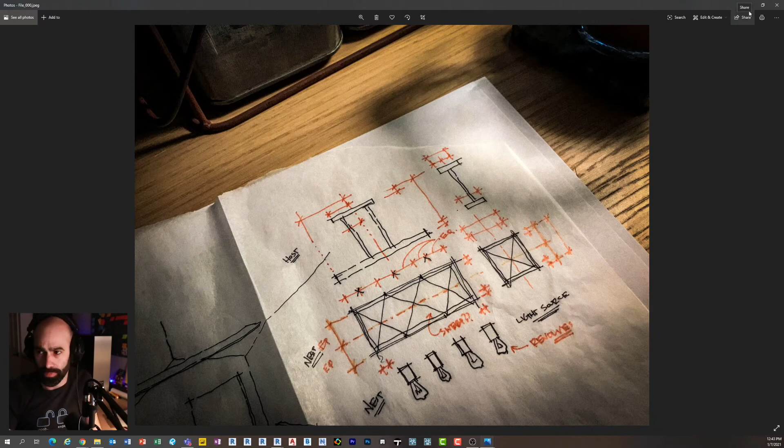The cage is going to be a nested family, and then the housing with the cables and all that stuff is going to be a nested family. And so that was my initial sketch. As I went through it, I realized that there actually was going to need to be one more nested family, and we'll talk about why.

Let me zoom out a little. So as you can see, we have the host, which is the railing, and this is the plate on the top, and then the plate on the bottom.

Then we have number two, which is my Edison bulbs, and that's going to be placed four times. There's four of them, so you make the family once, you nest it in, and you place it four times. There is my cage, and you'll notice the X bracing on the cage is actually a nested family, and we'll talk about that in a second.

So at the end of the day, there ends up being three nested families into one hosted family. So it takes four files to make this one family. But we're going to walk through why that is and why it's important.

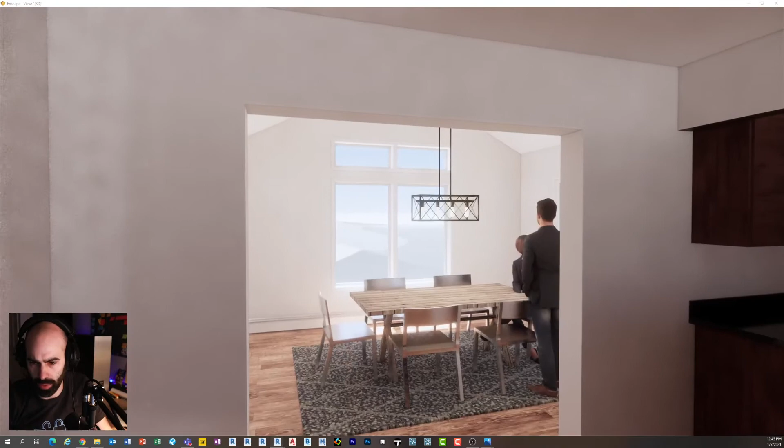And just to give you a sense of what the final one looks like in space, here's Enscape. I just now started adding some finishes and details in the interior. I didn't do too much more than I needed for documents, but you can see here's the light fixture there, right in space. Pretty cool. You can see it, as it is.

So now let's talk about how this family's built and why it's nested the way it is, and I'll run through sort of the start. So here is my host family.

What I mean by host family is this is where all of the other family files, the other pieces of this component, are going to be loaded into, and then this is what you load into the project. So everything else I show you after this, you're not loading into the project. Those are loading into the family.

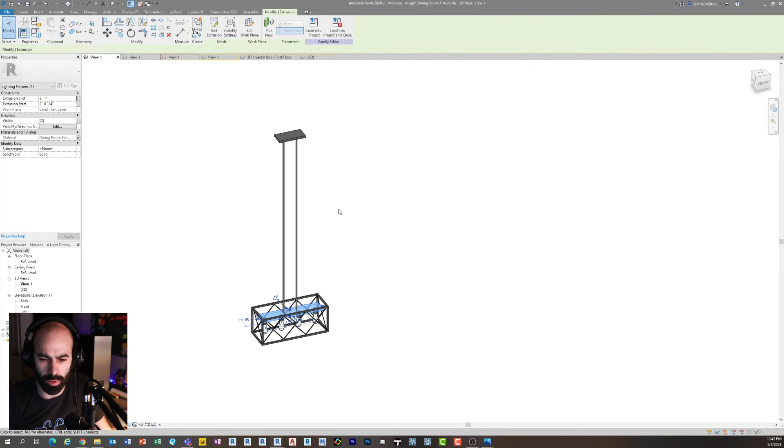So this right here is the host, and I said usually there's sort of two reasons why I choose something to be a host. One is the more simple objects. So you can see this is pretty simple. If I click, there's an extrusion here, there's an extrusion here, and there's two rods here, I guess you could say. So that makes kind of sense, right?

The other thing is obviously a host family, if you're hosting it to an object, you're going to want those things to be part of the object. And I know there's going to be a little bit of a debate, and I'm completely open to it, so make sure you guys chat down on the bottom.

For this one, I actually went with a ceiling hosted light fixture—sorry, a ceiling hosted generic model. Not a light fixture, because I didn't want the light source in there. So I started with a ceiling hosted generic model.

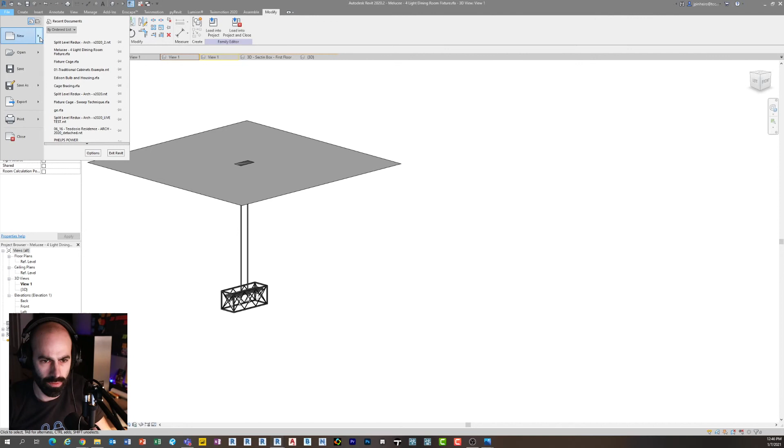So let's do that. Let's go File, New, and I'll talk a little bit about why I did that. File, New, Family. And of course, all my stuff is going to open on the other screen, I apologize. So I'm going to go with a generic model ceiling based.

Two reasons. I know a lot of people like to do face based, which I'm a huge fan of for light fixtures, because then you don't need a ceiling there—you can host it to anything you want. My biggest issue with face based, especially right now, is that you have to build it upside down. Anyone who's ever built a face based component knows the face is down, you have to build it upside down, which is super confusing, especially when you're trying to teach. So that's one of the main reasons why I did a ceiling based.

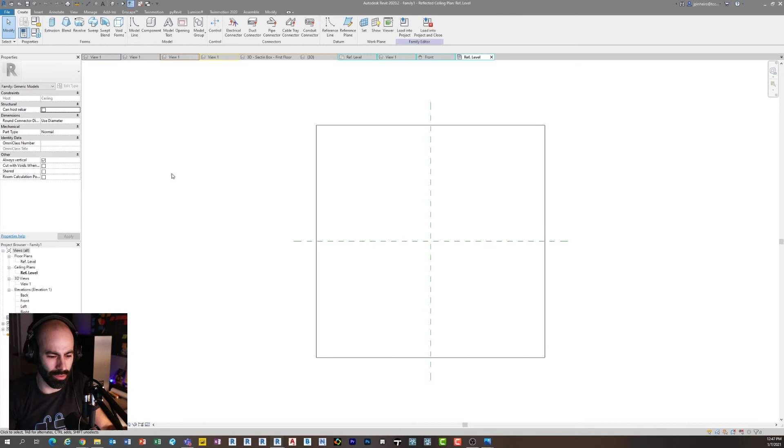Otherwise, we can go through the reasons why you may want to do one or the other.

Real quickly before I jump in, Rick just asked what the file size is. Honestly, I didn't even look yet, Rick. Let's take a peek. I'm curious now. So 732 kilobytes. So not too bad. Still under a meg. So I mean, I'll take that.

Okay, so now this is a ceiling-based family. So if I go in 3D, right, there's my ceiling. So I'm gonna be drawing it basically in an RCP type of deal. So as with everything in family creation, what we want to do is build our reference planes first. Okay, you want to build your cage.

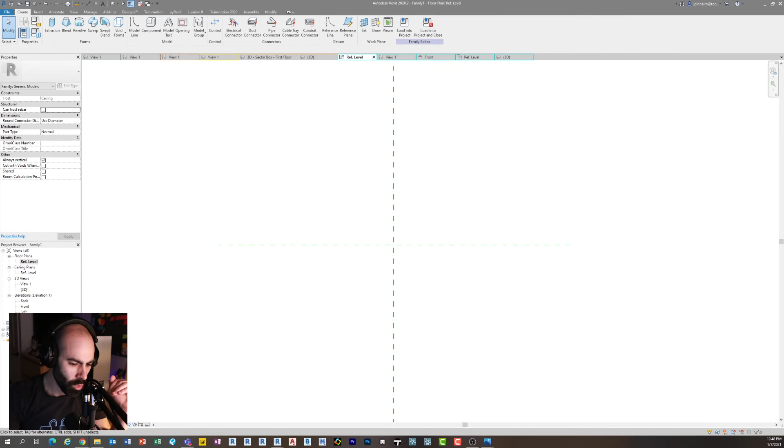But what you'll see is that the whole idea with families is you want to create your rig out of reference planes, flex and test it, and then you build your geometry. It's the easiest way to do it.

So if I'm going back to my sketch and I'm looking at this host now, you can see I have a plate, and then I have a bulb holder, we'll call it, or a bulb housing, and then I have two rods. So we're just going to quickly draw the reference planes for those. And I am going to go a little bit faster this part because we only have so much time, and I really want to get to some of the nuts and bolts.

So what I'm going to do is just draw a reference plane, RP on my keyboard. I believe this is 10 by 10. If you don't believe me, I'll go here and show you. So you can see the box is about 10.3 inches by, or the top box is 10 inches by 4.25 inches. So we're gonna do the build plate right now.

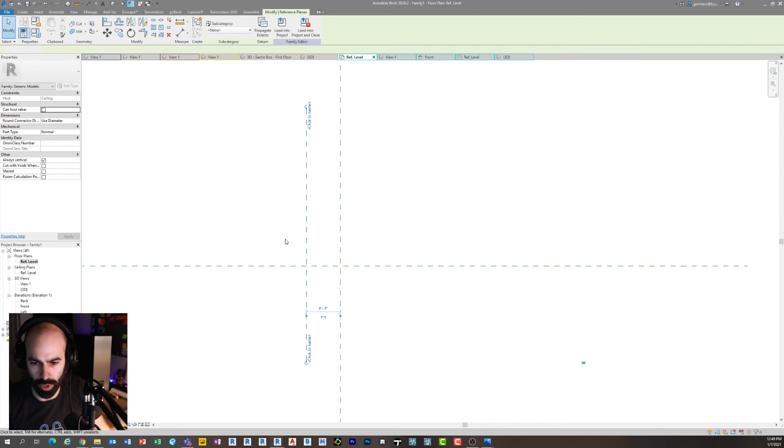So there's 5. I'm gonna use MM on my keyboard to mirror it. I'm gonna draw another reference plane here. I'm just gonna move it out. What did I say? 2.25 inches. Sure. MM on my keyboard to mirror it. Okay. So now these reference planes here, these are gonna represent the wall plate, right? This is the top wall plate. Remember, I'm looking down in a floor plan view right now.

Okay, so this is what I'm talking about with reference planes. It's really important that you understand what we're doing is building the rig to flex everything, and then we'll build our geometry. Okay, so now I want to draw one more reference plane on this side for the housing piece, which again, I'll go back here. The housing piece I'm going to call the part that's holding the bulbs down on the bottom there. It's a long rectangular piece.

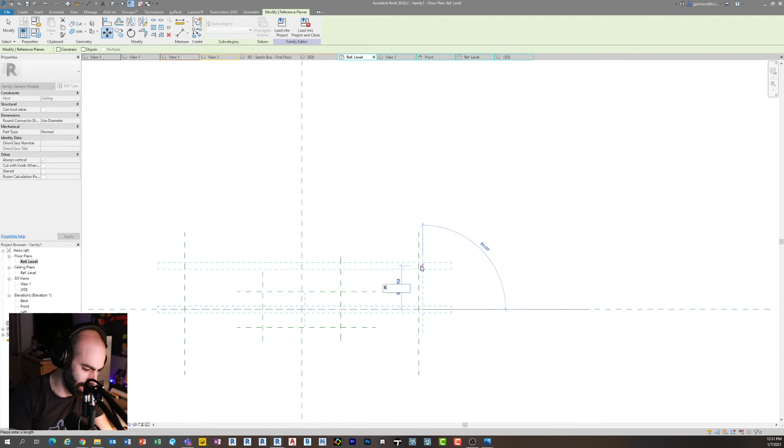Scoured just said, sorry, I'm just checking as I go along. Scoured says, I usually start with a non-host and then set it to a work plane check and check if it's always vertical. It is more flexible so you can rotate the work plane and etc. Okay, yeah, so Scoured is starting with a non-hosted object. And again, as I mentioned, one of the main reasons why I did it was for clarity and understanding while teaching. But there's different ways you can do it.

Notice what I'm doing here is as I'm drawing these reference planes, I'm actually pulling them back. This is something I do to help me in this view understand what all these reference planes are for. You can name them, you can do whatever you want with them, but I'm just sort of pulling them back. So now I just mirrored this. So now you can see I have these reference planes, and then I have these reference planes here. So this is going to be my bulb plate, which is actually way too thick, so we'll fix that after.

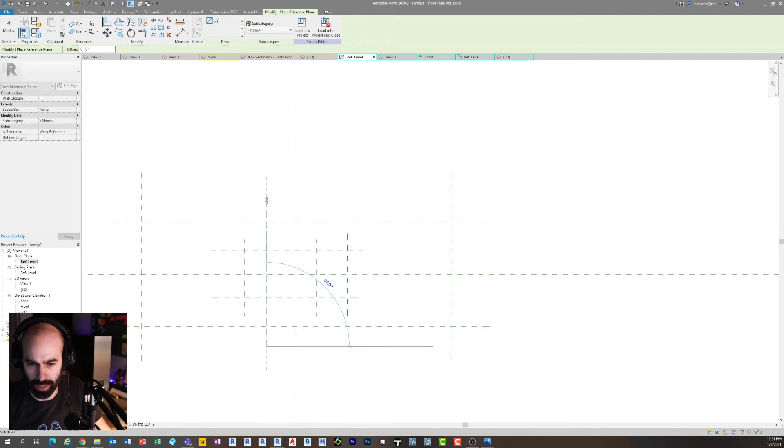And then my electrical conduit plate, whatever you want to call it at the top, wall plate maybe. So that's going to get us most of this. But now the only two other things we need are the cables. So I'm going to draw 2 reference planes here, RP on my keyboard for reference planes. I'm going to make this one a little bit longer.

And somebody asked if when I flex it, does everything flex with it? Yes. And so I didn't show you, I guess, how it works parametrically, but we'll just show it at the end then. So if I click here and type MM, these right here are going to represent my cables. So if I go back to the family, the 2 cables that you're running down there. And I'm going to show you some things that I do. Some people treat circles differently, but I think this is a pretty good trick.

All I need is an X. I need an intersection because my circles are going to actually lock to the intersection. Okay, so that's basically all I need for my host. I'm going to need a few more for the bulbs, but mounting plate, good call. Yeah, we'll call it mounting plate. All right, so now I'm just going to make my dimensions. Remember, reference planes, dimensions, flex it, then we draw geometry.

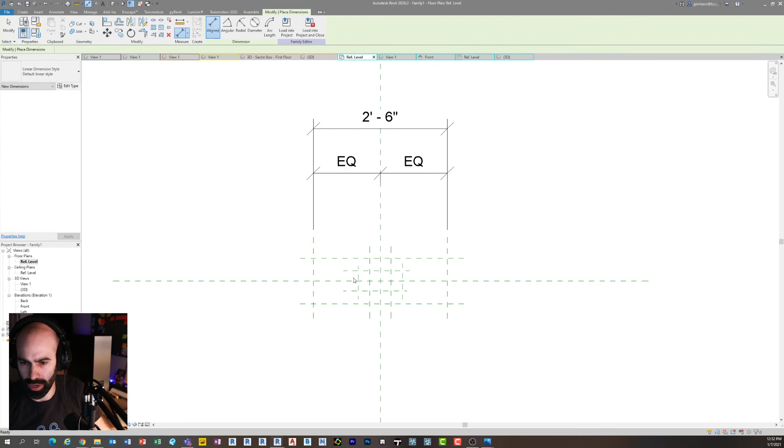Okay, so I'm going to do DI on my keyboard. I'm going to do overalls. I want to keep this thing centered, so I'm going to do dimension down to the middle. DI on my keyboard, overall, dimension down to the middle, and EQ. I'm going to change the scale a little so that the text isn't too big here for you guys. There we go. All right, so that's going to get my overall plates.

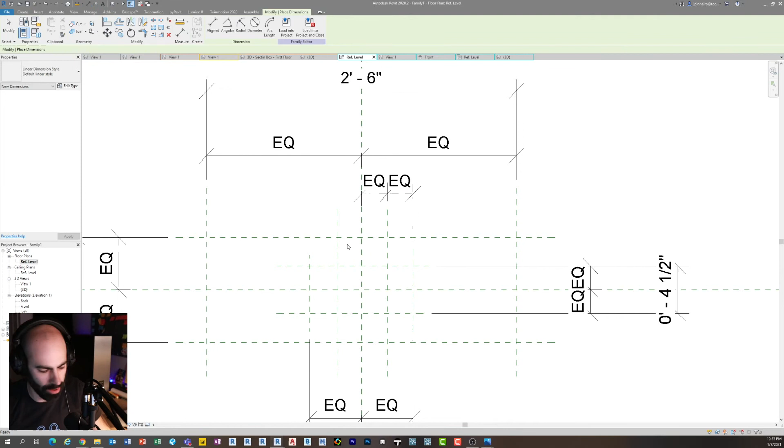And then if I go in here, I'll do my mounting plate, which is what we all just decided to call it. I'm going to EQ this. And then I'll do this dimension here, which is my mounting plate depth, I guess you could call it. I'm going to EQ this here. My circles or my rods are actually going to be just centered on that mounting plate on each side. I think that's probably the easiest way to do it. So if the mounting plate grows, it stays centered. So there we go there.

So now I basically have my rig for that piece, not the rest of the cage, etc. So now all I need to do is assign these dimensions to parameters and then flex them. So I'm going to click this, and again, I know I'm going a little fast. If you want to dig through more beginning stuff, it's the same stuff, just slowed down. Check out that episode I just posted.

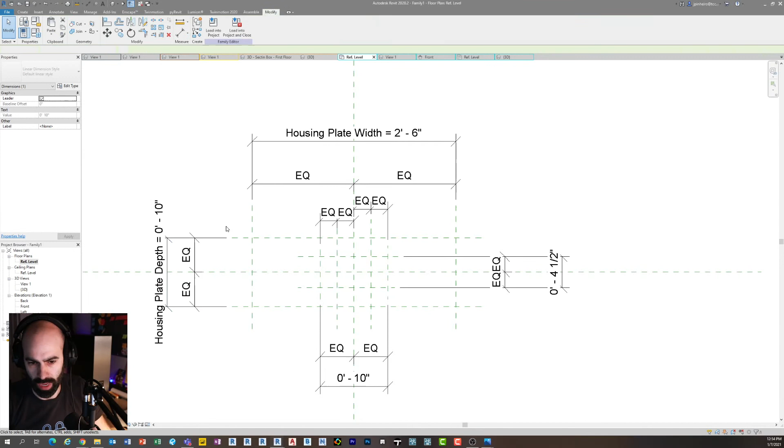But I'm going to click on the top here to add a parameter. I'm going to call this one, what did we want to call this? I'm going to call this my housing plate width, and then this one's going to be my housing plate depth. Housing plate depth. And I'm making these all type parameters. And I'm going to call this one my mounting plate depth. And then this one I'm going to do as my mounting plate width.

Okay. So now, if I wanted to, I can quickly just flex these parameters. So I'm just hitting the blue boxes on the top, and I can change this. So my mounting plate width, I'll change to 12 inches and click apply. And you'll see the reference planes grew. If I go back to 10 inches and click apply, you can see they shrink. And all this stuff stays in the middle. I'm not going to flex everything right now, but when you're building families, I suggest you flex everything before you build it. So then all we have to do is draw our geometry in here.

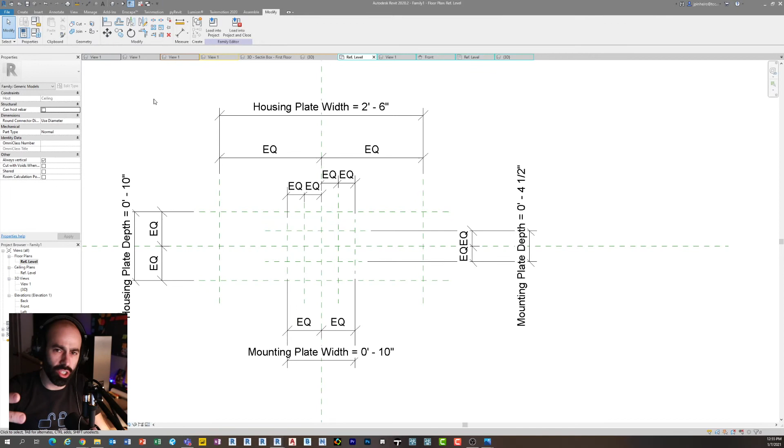The one thing I just, no, that's fine. So how do you draw geometry? Pretty simple. We're just going to create extrusions and set it and go on. But I just realized this is just floor plan view. We're going to want some reference planes in elevation, right? We want to have control over the thickness of the plates. We want to have control over the distance away from the ceiling. So I'm going to go to my front elevation, and you can see here's all my reference planes from my floor plan view, and here's my ceiling there.

Okay, so I'm going to draw a reference plane here. Sometimes I like to draw them and use temporary dimensions. Sometimes I like to draw them and move them. Right now I'm drawing them, moving them. Doesn't really make a difference. I'm going to move this down. I think it was 3'9". I don't remember exactly, but I'll just do 3'9" for now. And then I'm going to copy this down 10 inches.

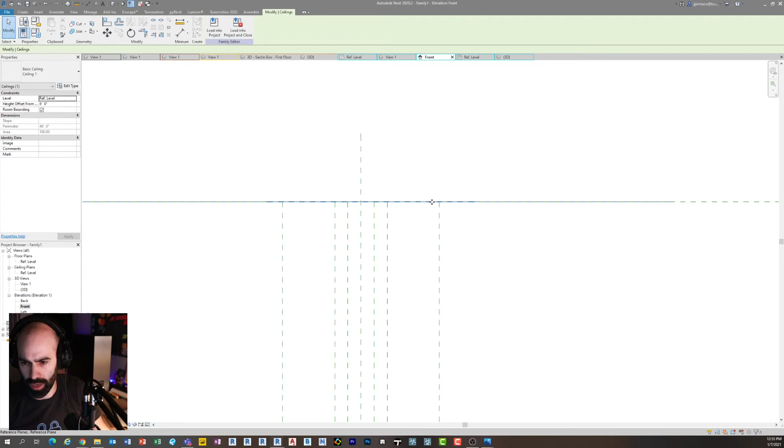So that's generally going to give us our cage, let's say. And then I'm going to go in here and I'm going to take this reference plane. I'm going to move it down 1/2 inch for the mounting plate. So right that, and you notice what I'm doing here is I pull this reference plane back. This is just something that I do that makes it really, really helpful when you're trying to figure out where geometry goes, is to pull your reference planes back.

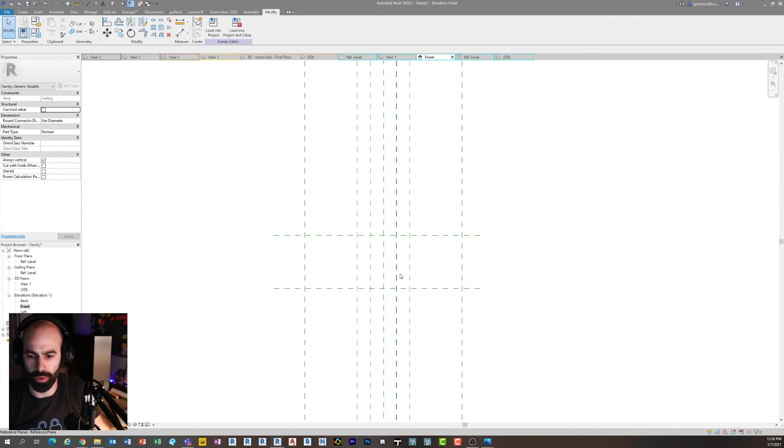I mean, you could name them too, but pulling them back to sort of draw the geometry for you is extremely helpful. Like even this one here, which you could see is going all the way down. If you were to pull this back, because this is only controlling the mounting plate, right? Now you're kind of drawing your geometry there with the reference planes. So something super helpful, and hopefully you guys can see the reference planes okay. I know reference planes are one of those things that are hard to project, but what I'm essentially doing is making this elevation here.

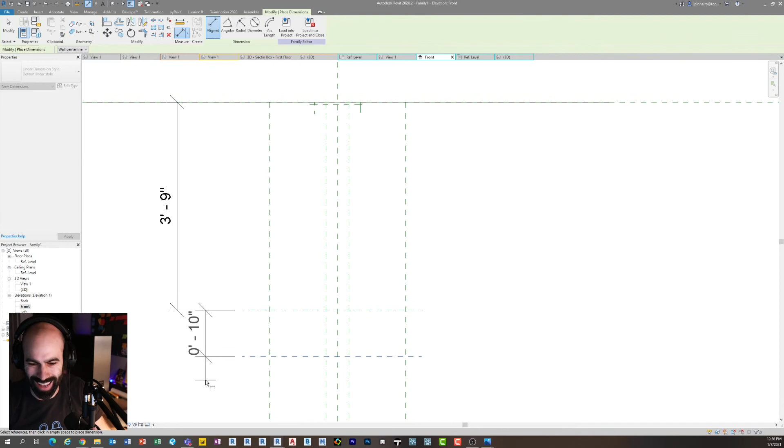Okay, so now let me just dimension it really quickly. I'm going to dimension it off of the reference plane. Again, we can go through a whole debate on whether to hit the geometry or the plane. I'm going to use the reference plane that represents the ceiling without debating why. And then I'm going to do another separate one. So you can't have a string here. You need these to be 2 separate dimensions. And these are going to represent the offset from the ceiling and the height of, let's say, the cage.

I just realized looking at this again, if I go back to the picture of it, oops, we're actually going to need a few more reference planes in here, because as you can see, what we're going to call the housing, the bulb housing, is actually offset from the cage. So I'm going to copy down now, and I'm going to make up the dimension of this and just call it what you're seeing there.

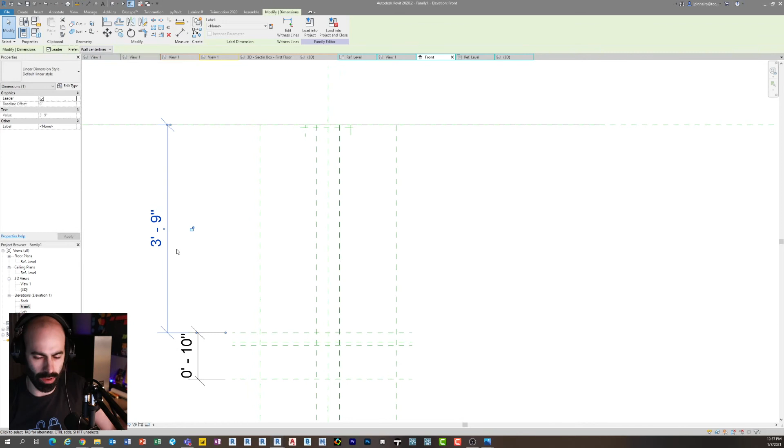Awesome. Looks like Mark said you can see the reference planes fine. So now this is going to be our actual plate. This is going to be our cage, let's say, and we're probably going to need more reference planes there for the cage. So we'll get through that down the road. I'm going to go to a more complete version, anyways. So then here I'm going to call this one offset from ceiling. Again, you can call these whatever you want, but offset from ceiling, or maybe down from ceiling, whatever. And then this one I'm going to call the cage height.

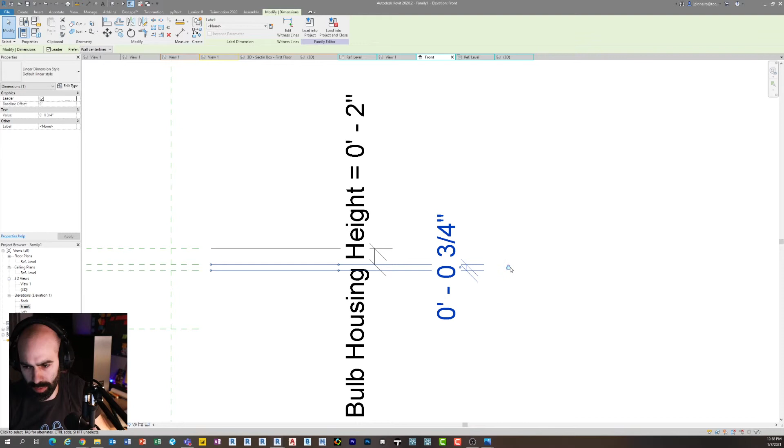And then here, depending on what flexibility you want, these can be lock dimensions, or these can be parameters. I like to try and give parameters wherever possible. Sometimes it gets a little crazy when you give parameters everywhere possible. So here we might say, just because if it gets too high, we might want to flex it, I might say bulb housing height, or offset. I'm not really sure what we want to call that. And then here, maybe I'll say the bulb housing is always going to be 3/4 of an inch, so I'm locking it. Okay, but that's not really important.

What I really want to show you, oh, actually, I didn't hit this one either. Let me hit this one here, right? And that's going to be our mounting plate height, or mounting plate thickness, whatever term you like to use. Mounting plate height. Okay. So now drawing the geometry is simple. Right now we're just doing rectangles. So if I go back to my reference level, I'm going to say create extrusion. Oops, I just realized by shifting my reference plane, I didn't see that mounting plate anymore. So I just went to the ceiling plan instead of the floor plan.

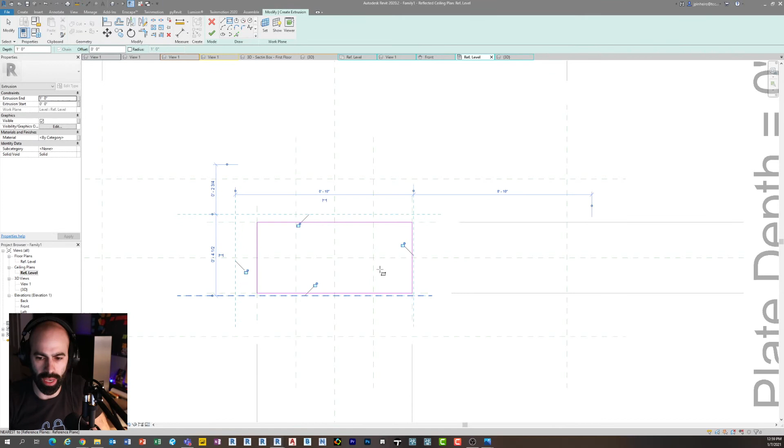I'm going to go to extrusion. I'm going to draw a rectangle. And if you guys saw my other tutorial, rectangles are nice because when you click a rectangle, you get all of your locks in here, right? And then you lock, click finish, go to your front. Here it is there, and then you can pull this up and lock it and lock it and lock it. Okay. So these are just going to be rectangles, right? If I go underneath here, here it is there.

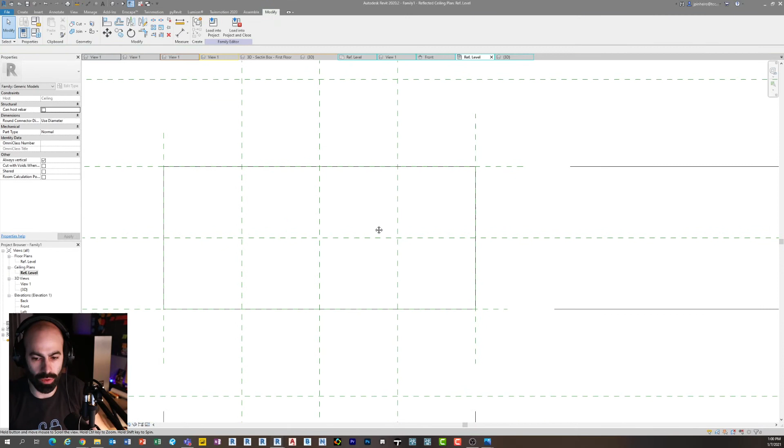Right, there's my rectangle. So I don't need to draw all those rectangles. What I want to do is show you how I'm going to draw these rods first. Okay, so if you remember, if I go on my ceiling plan, the rods are going to be centered on here. And this is one of those things where, yeah, the rods could be a nested family if you want. It doesn't really make a difference, and sometimes it's easier because they're circles. Maybe you can lock this way, but I do want to show you a way that you can create circles that stay and do what you want without actually making a nested family.

So I'm going to say create extrusion, and I'm going to click this circle. And I'm just going to draw a circle that for now is 1/4 of an inch in radius. There we go. Now what I'm going to do is click the circle, and I'm going to say make center mark visible. When I click that, you'll see there's this pink center mark.

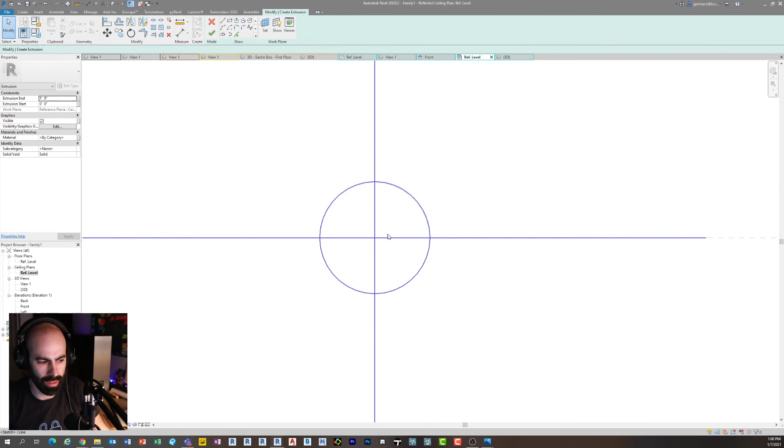And what's really cool about that is if you use the align command, AL on your keyboard, I click my reference plane, and then I click that center mark, and then I lock it, you'll notice it actually lets you lock to it, right? If I do the same thing here, click this reference plane, click the center mark, and lock it, now I've got a circle that's locked to the intersection. So I don't need a whole bunch of reference planes all over the place. It's just 2 reference planes intersecting, and that's going to keep my circle exactly where it needs to be.

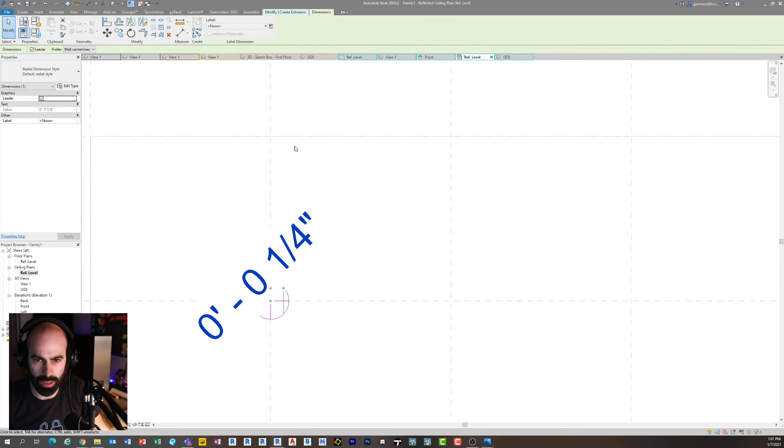All right. So now, just for the sake of it, I'm going to give myself the ability to control the diameter of this, or the radius. So I'm going to click my dimension. Whoa, look at that scale, huh? Let's go down a little bit. So I just turned my temporary radius into a permanent dimension, clicking the little blue dimension icon. And then I'm going to say create a new parameter, and I'm going to call this cable radius or rod radius, whatever. And now when I make my other circle, I can just apply that there.

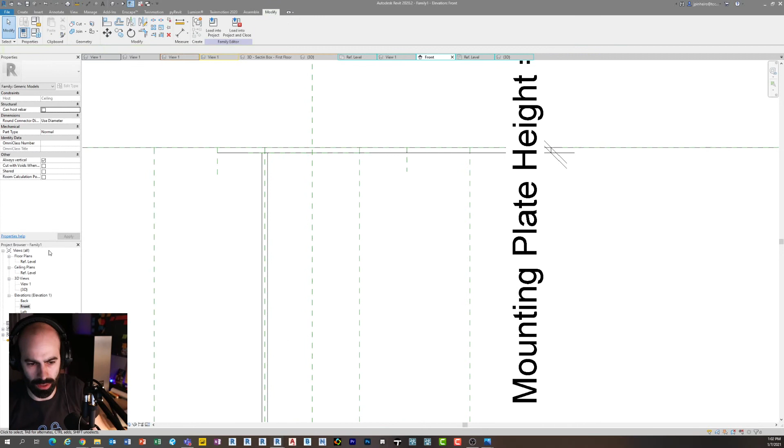And now if I click finish, now we have a circle. If I go to the front, we have a circle that I can lock, and I can lock here. And now if the width of this flexes, this circle is going to go with this reference plane. So to show you what I mean, if I change the mounting plate width to 1'6" and click apply, notice this reference plane went with it. So the circle is now locked there, which is pretty cool, right? And then you do the same thing on the other side. You would just do circle, click it, 1/4 of an inch, etc.

So now we sort of have our host. And let me go to this file here and highlight just the host so we can look at it. There we go. So then when we're done, this is essentially what we have. We just have these pieces, and they're all flexible to what we need. So pretty straightforward now. Now you're breaking it down into components that are manageable and understandable, right?

And if I go to my front view now, this is the final. You'll notice there's a few more reference planes, but pretty much the same thing, right? There's a fixture height. There's a bulb plate. I guess I called it bulb plate when I made it this week. And then I locked the 3/4 of an inch, but I give myself the ability to modify this. So the only reference planes we're missing right now that we drew in the original one.

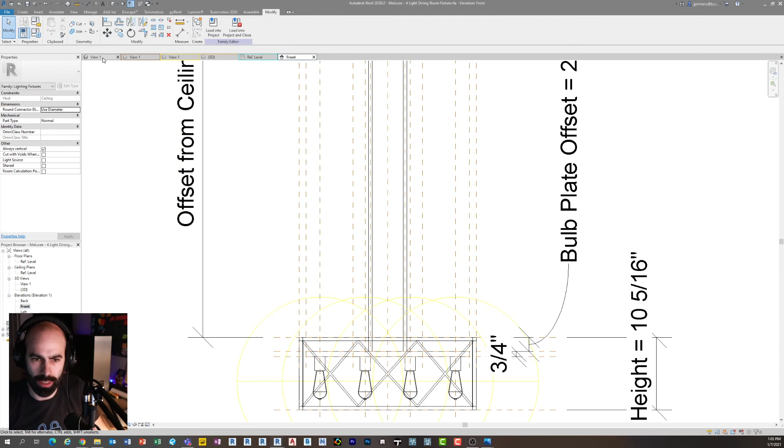Eric just asked, could you copy that rod? Yes, you could, but hold on, let me find that. But you will have to reassign the centers. If you're copying like this in floor plan, so I just typed CO and copied it over, it should hold on to the top and bottom locks, but obviously if I go to edit extrusion, you're going to have to do align, AL on my keyboard, and then redo the centers here. So good point there.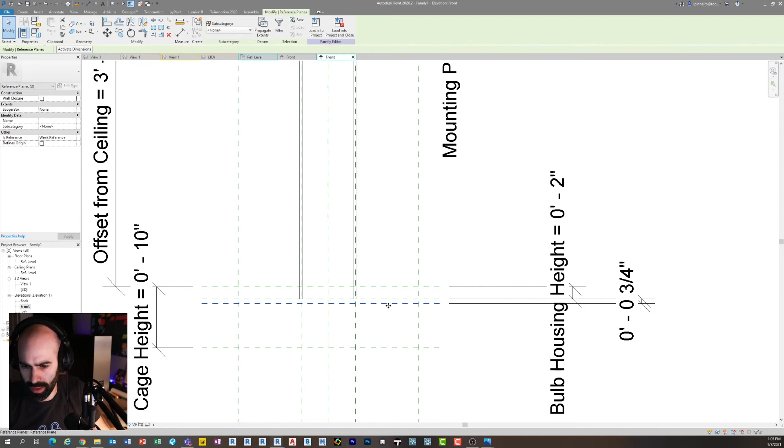And let me actually check. Let's see if it kept. So when you copy something, as long as it stays in plane of where it was, a lot of times it will hold on to that. But let me just see. So if I move these down, no, look at it, didn't. So you're going to have to relock a few of these things.

There we go. Now they work. So yeah, copying helps, and this is why I will use copying as much as possible, but a lot of times I recreate or replace things, because you most likely are going to have to relock and reconstrain things when you copy them. So copying them is fine as long as you double check all the constraints. And how do you do that?

You flex it, right? That's why it's so important that after you build your rig with reference planes, you flex your rig. After you build your geometry, you flex your rig. You always want to flex it over and over again to make sure that you're not blowing crap up, because you will blow crap up.

It's just what happens. All right, I can't remember what colors are my project now. Sorry about that. Here we are. No, that's the other one. Let's see. Where's my host? And remember, guys, this is live, so feel free to ask questions as I'm going through it. I literally don't know what I did with my host.

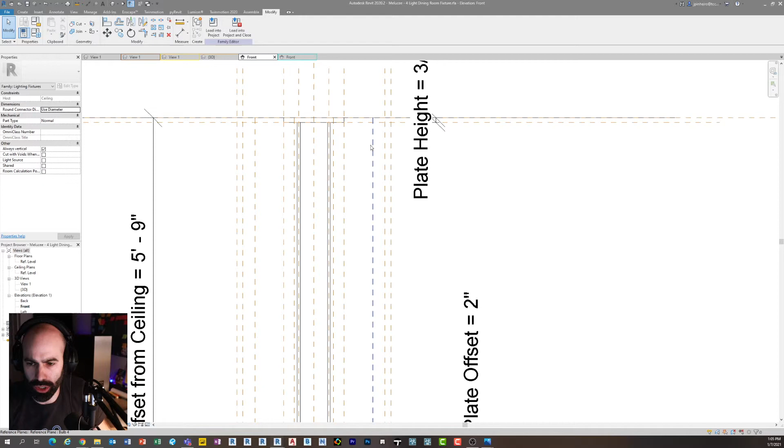Here it is. Okay. So as you can see, there's a few more reference planes here that I added. These are simple reference planes to control the bulbs. So there's 1, 2, 3, 4 that are just going to control the location of the bulbs. And if I go to my floor plan, you'll see those are right here. And they're equalized. So here's 1, 2, 3, 4.

They're equalized, and then they have a lock of 2 inches on the end. I didn't feel like adding a parameter to this, so they'll always stay 2 inches to the end, and then they equalize. I did not make it yet an array parameter where it's going to show 4 or 5 bulbs, which you can do, but that's a little bit further than you want.

Karina just asked, if you make a lot of light fixture families, would it make sense to create a rod family that can be nested into the parent families? Yes, but something like a rod, to me, doesn't really make a difference. You're going to place it, and then you're going to have to align the centers, lock, and then align the top and bottom, even if they're instance parameters. So yes, you could do that.

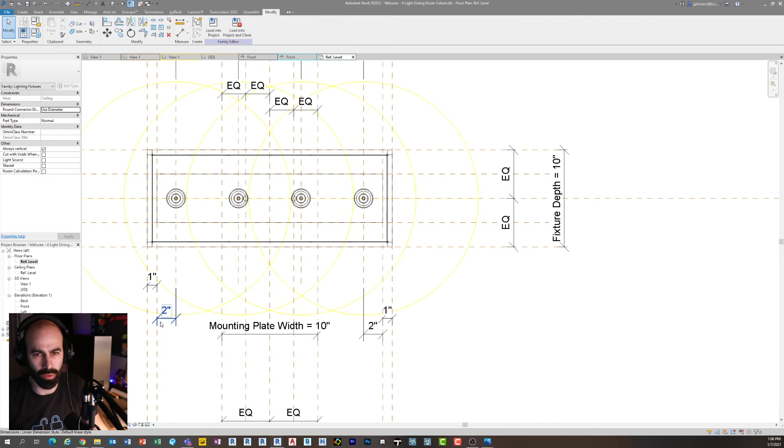It's fine. But honestly, it doesn't make a huge difference. It would probably be about the same amount of time, efficiency-wise. But that's a good point. So Karina was asking if you made a rod family instead and loaded it in.

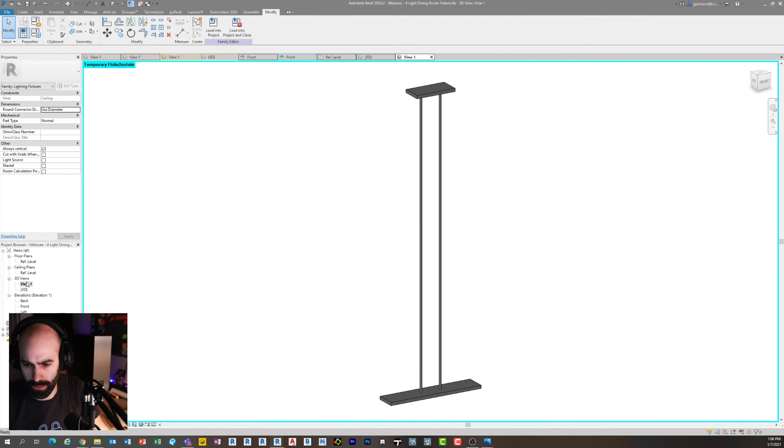Okay, so that's sort of the housing. And if I go back to the 3D view, this is the host. Oh, where did my host go? Oh, there it is. So this is the host. So now let's quickly talk about the bulbs. You saw I had reference planes there, and those just stay equalized. The bulb family is super simple.

I completely forgot all the colors here. I'm sorry, I'm flipping through families, but the whole color thing with tabs makes so much sense. It helps, but having the file name or something on the tab would just help everything. Anyways.

I didn't feel a need to make the bulbs parametric. I just needed them to be the right size and be a family so I can load them in, make multiple versions of them, but also bring in their light fixtures. So this is actually a light fixture family. If I turn on the light source, you'll see it right here. And it's extremely simple. If I go to my front view, here's my light source elevation. I have that centered on it.

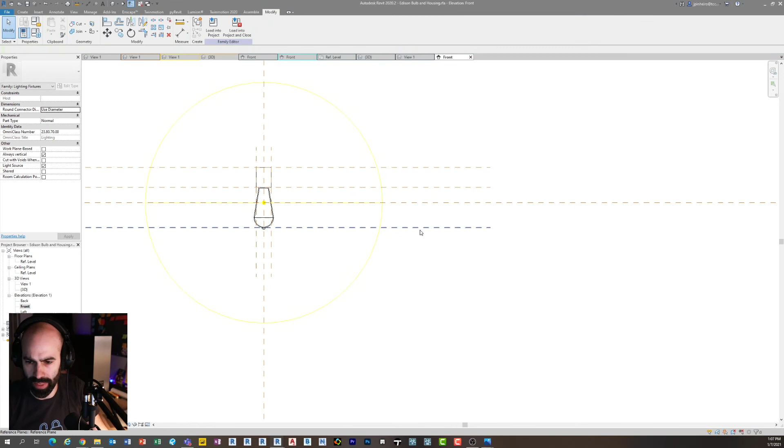And then I have these reference planes, but they're just guides for me, from looking up roughly the size of the bulbs in the housing. And then this right here, if I go to Edit Revolve, is a revolve. The reason I did it as a thin piece is because I want it to be glass, and I wanted it to show the light through and have that effect in Enscape. So that's just a nice round bulb.

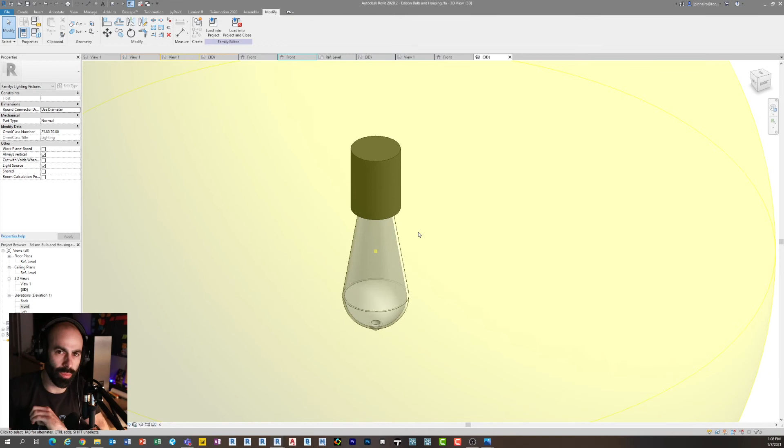And then this guy here is just an extrusion. And that's it. This is something that makes sense to have as a nested family, because it's easy to work within the element and easy to bring in and multiply across if you need multiple light sources. But also, this can be pulled into any other chandelier I do that has an Edison bulb, for example.

So super cool, super powerful. The only thing you'd want to pay attention to is making sure that whenever you do nested families, you want to give your materials a parameter. So my bulb housing and my bulb, they have their own material parameter. That's one thing you want to do because once you start nesting things, you need to make sure you have the ability to modify them from within your host family.

Bob Lupo just asked, my colored tabs are coming from the pyRevit plugin. If you check out previous episodes, I had Ehsan on a few episodes ago about pyRevit, and as part of pyRevit, you get beautifully tabbed colored tabs.

Tom just asked, which light fixture did you use to create the bulb? I just went to a generic, so I went File, New, Family, and I just went to lighting fixture. That's it, nothing, no host, nothing. It's just lighting fixture, because what you're going to do is when you bring it in...

And this is what I'll do right now. So if I go into my host now - man, I keep forgetting which one my host is. Where are you, host? This one, it's the dark purple color.

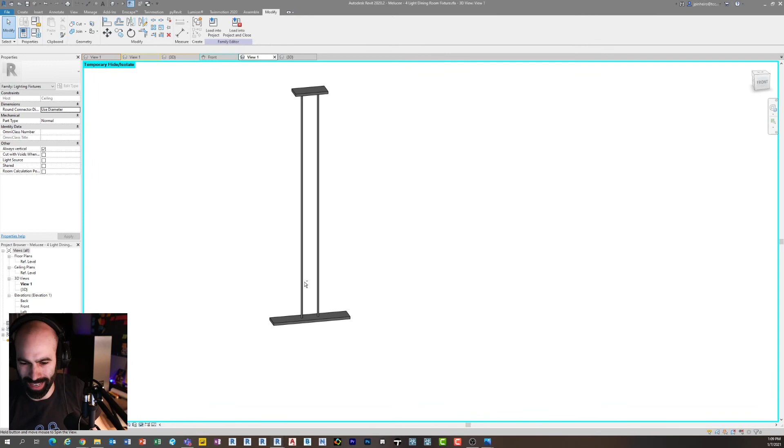Okay, so when I bring it into my host, I'm going to delete these bulbs and bring them in again for you guys. Let's delete the cage too, why not? Should have done this from the start. Probably a good idea. I'm going to save as, just because this is a live version now, don't want to screw that up.

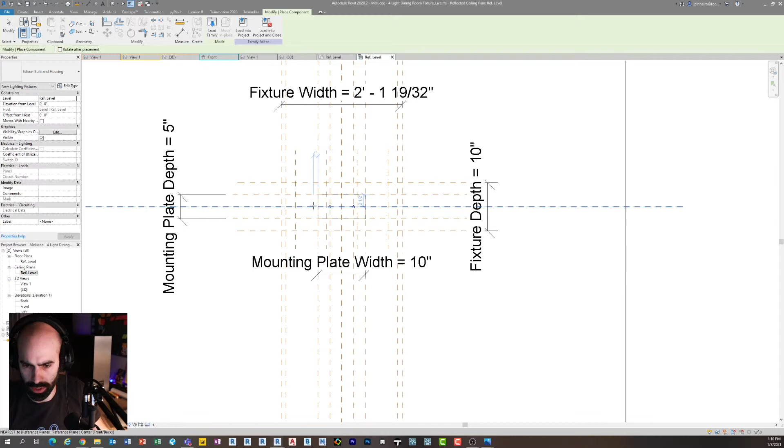Okay, so now when you bring them in, I usually like to bring things in floor plan depending on where they're hosted. But once you bring them in, they're going to be placed like a component. So here's my bulb. I'm actually going to go to my ceiling plan so you can see it. Try again. For some reason it's not letting me see it. I'm not really sure what my view's set up, but I'm just going to place it out here somewhere. So I just placed it, it yelled at me, you can see there.

Darren just asked, are you adding an electrical connector? I did not, but what you could do - even though I started with a generic model as my host - remember, this is all going into the host now. If you wanted a connector on the bulb itself, each bulb needs a connector, then you'd have to go through a process. But to put a connector in here is pretty simple.

All I have to do is change my category, which I did already, from generic model to lighting fixture. And then from there you can add an electrical connector, and you can place it in your family wherever you want. I did not add it for this, just because I didn't really care right now, but you could easily add it without any issues. So here's the bulb, and you can see it's generic, so it's just kind of floating there.

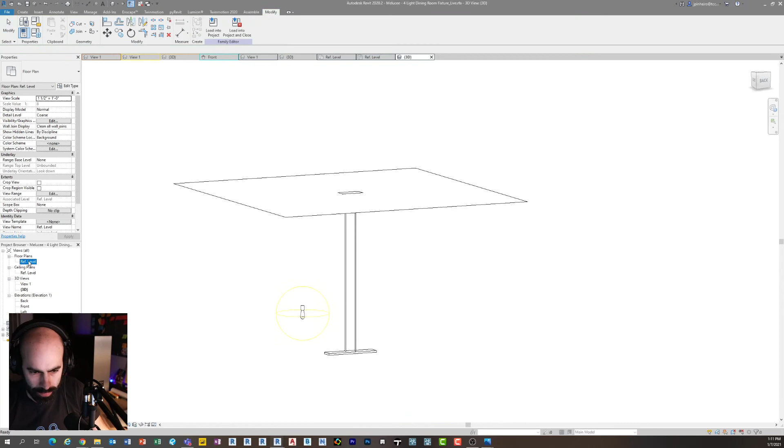So what I'm going to do is go to my front view - sorry for flipping a lot of views, but that's just what family stuff is like. Usually I'll have a tiled window, but because I have so many files open, it's just going to be even more confusing. So there's the bulb, and what I'll do is use the align command, align it and lock it, then align it horizontally and lock it. And now I have it good to go.

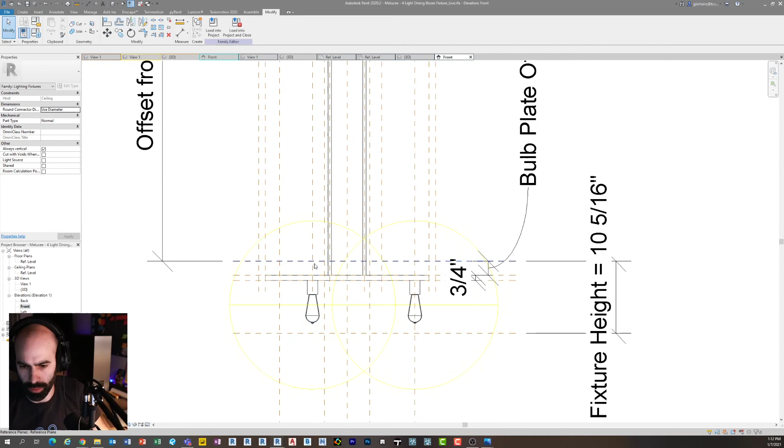And here I think if I copy this guy across reference planes - I believe, I don't even know if those are the bulb ones - I believe it'll hold on to the horizontal lock. Let me see... no, it doesn't. So you have to relock it anyways. So align, lock, align, lock. I don't think those are the bulb ones, are they? Yeah, I should have named these.

Edward, nice to see you again, bud.

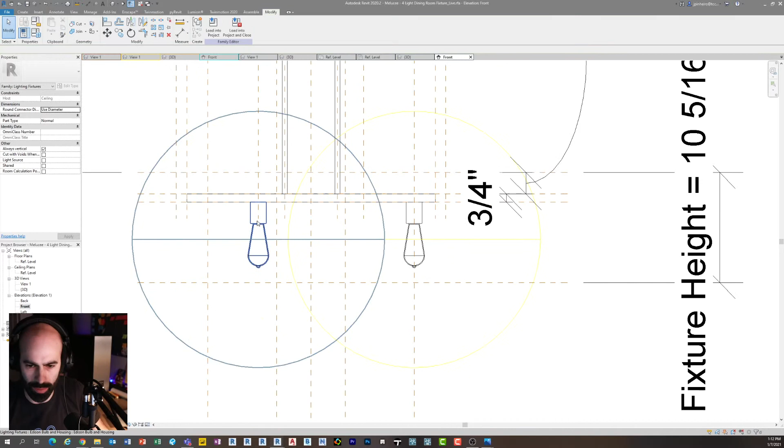Actually, I think I did name the bulb ones. Let me click them - yeah, bulb 1, bulb 2. See that? Look at that. So I gave these reference planes names. So I can quickly look at this, and you can see I'm actually on the wrong bulb ones. So let me unlock this guy, do align, lock it, and then I can copy this over here.

And so that's, Tom, why I just go with the generic - because you don't really care about the host in this situation. You're going to place it, and you're going to use these locks to align it. So now I'm just using AL on my keyboard, selecting the reference plane, selecting the base, locking it, selecting the reference plane, selecting the middle, locking it, and so on and so forth. And so now if I click each one of these, you'll see they've got their 2 locks and they're good to go. And so that's it.

Darren was saying the locks drop with the copy. Oh, I didn't align them in this direction. Look at that. So let's go to my left view now.

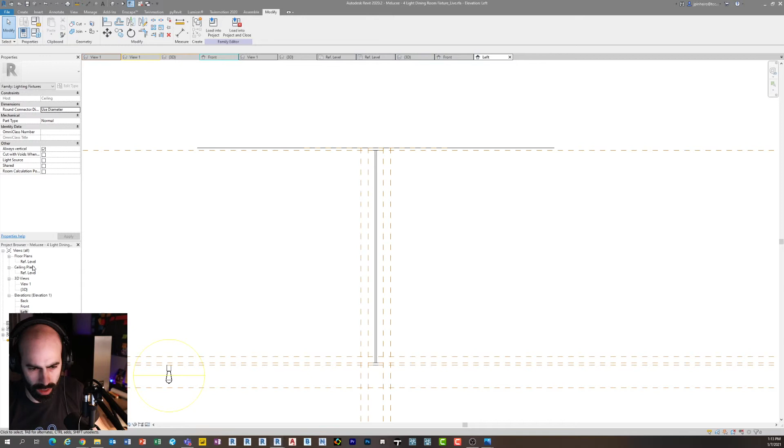Of course I can't see my center line for some reason in the left view. How funny is that? There's my center line there.

I'm going to do align. I'm going to do a multiple align now, which those of you who don't know, it's up on the top. You just check the box. I'm going to click the reference plane. I'm going to click the middle, lock it, click the middle, lock it, click the middle, lock it, click the middle, lock it. Okay, so now I've aligned them in vertical, horizontal, and you can see in the other direction.

So now we've got our light fixtures, and notice how they each have their own light source. And for those of you that don't know, when you nest a family in order to pull those parameters through, with a nested family, you've got this host, and then you're bringing in the light fixture, and then you're bringing in the host into the project. If you want to be able to control the nested family in your project, you need to carry those parameters through. That's really important with nested objects.

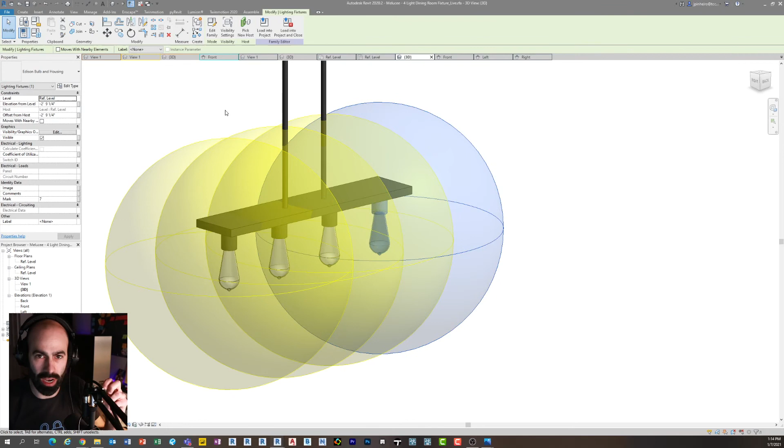So I'm going to click one of these bulbs and show you what you have to do. If you click your nested object, so now I'm in my family, which loaded a family into it, I'm going to go to edit type. And if I want to bring in these

materials, as you can see, if I go to none, what you would do is you'd click associate family parameter. So by doing that, you're saying I want to now take this family parameter, so if it's the color of the light bulb, I want to associate it with the parameter in this family, which is color of the light bulb. And so you're giving the project environment the ability to select and modify a parameter that could be 3 or 4 files deep, which is super cool, super powerful.

And that's why I said making sure that when you're making a nested family, you use specific parameters like material parameter.

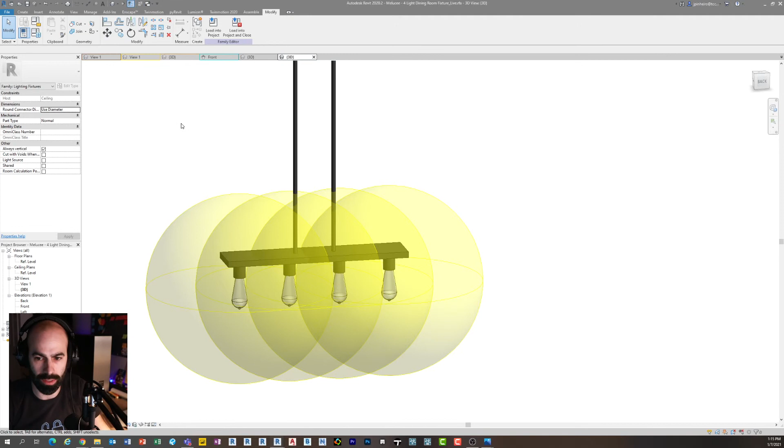All right, so now I do want to get to the cage because I know we're running out of time, and this is why I kind of pre-built it. The plan was to build this whole thing from scratch, but as I was doing it, I realized, as you do with every family, that there are more complications, but there are little things I want to show you, like what I was just showing you with the circle and how the nested families work. So I really want to get into the cage because I think the cage is pretty cool and there's a lot of lessons learned there. So if there's any questions, feel free to ask.

Yoshio just asked a question. Let me just see.

Yoshio asked, is it possible to create dimensions in a family file that stays to show on your project when loaded, not redimensioning? No. I mean, I guess if you made a 3D object that looks like a dimension, yeah. But no, these dimensions are meant to push and pull geometry and modify things, not meant to exist in both environments. However, when you have reference planes there, depending on which reference plane you're using, it makes your dimensioning easier in the project environment. That's why they give you strong, weak, all these different types of references.

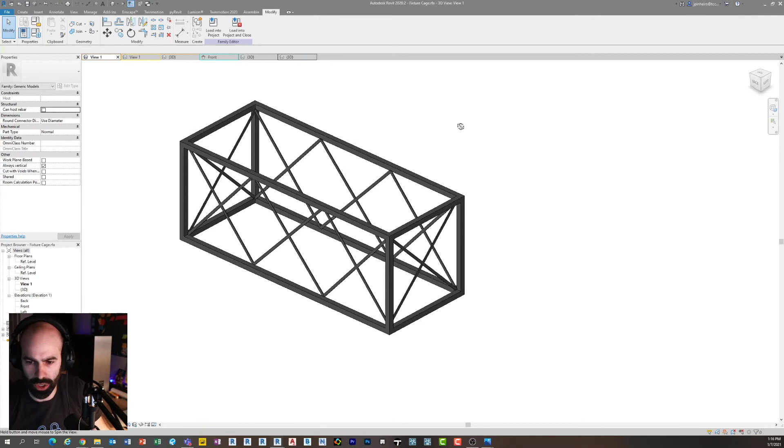But no. So now we're in the cage family. Okay, so this is the fixture cage. This is pretty cool because there's a couple things we can take away from the fixture cage. First is how you model the actual cage itself, which is pretty cool.

If I go under 3D, and yeah, Scour just answered and did say yes you can, but only in plan views and section, not with the section elevation. So yeah, there's a way to do it as symbolic annotations, but not. I think what you were saying is sort of in this 3D environment.

So okay, what you'll notice is that this is just a single extrusion, which is pretty cool. And then this just goes down in how, how do you want to make these shapes and what's the easiest way to make a shape like this cage.

So what I'll show you is the extrusion. First there's an extrusion, which gives you this box. You could make this a million different ways - these could each be extrusions, these could be sweeps, whatever. But then I just did a void in the middle of it that looks like this. And that's it - now you're only using two sketches to develop the outside cage, which I thought was pretty cool.

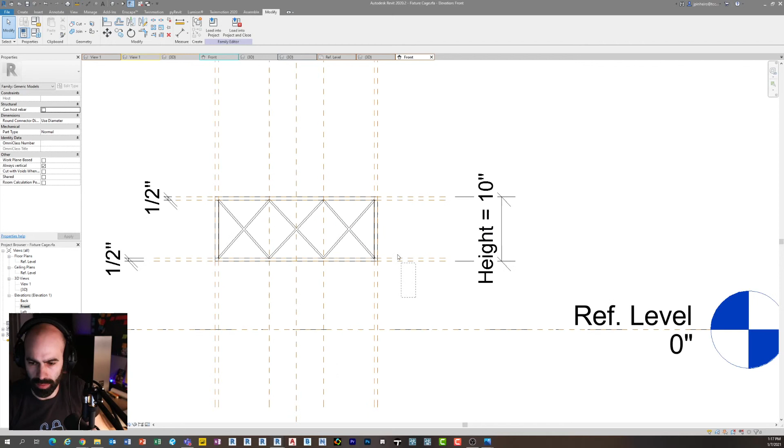So if I go to the front, you can see pretty simple parameters. There's heights, and then there's width, and I didn't even bother giving the ability to modify this. If I wanted to, we could modify the half inch. The one thing I will mention is that when you're doing something like nesting these families, all of these parameters - the depth, the height, and the width - these are instance parameters.

And this is important because when I load this into my regular fixture, I'm going to actually push and pull my box so that it locks within that family. If I did these as type parameters, I could do it, but then I'd have to make sure the center's aligned and make sure that the width is associated with it. So you're kind of doing two of the same thing - you make sure you have a parameter and associate it so they're always the same, or you bring it in and lock the outsides of it.

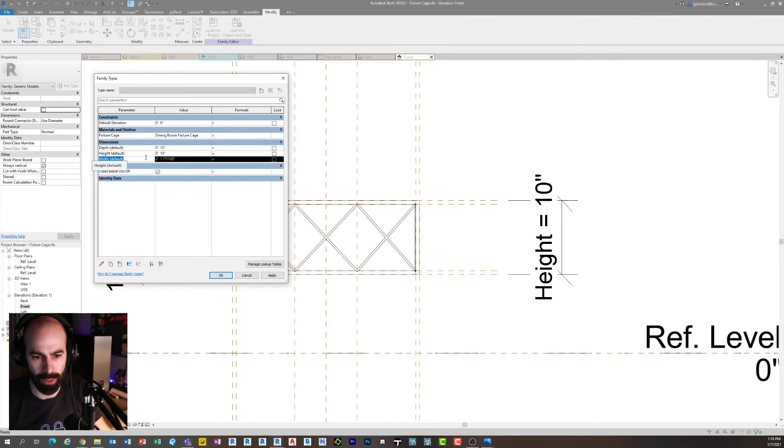So you kind of lock the middle or lock the outside. For this, I did the outside because I also just kind of like the way it looks. But what I really wanted to talk about was these cages or this bracing, because this is a perfect example of how you can skin a cat a million ways in Revit, and some are better than others.

When I first modeled this, I'm going to show you what it looked like. I used sweeps because I'm looking at this and thinking, okay, we have this sort of cage thing, and if you look at it, it's just two sort of Z shapes. And that works - these are sweeps.

They work. If I flex this, the width of this, it does what I need - click 4 feet, you can see there it goes. So these are just sweeps. There's one sweep here. If I go to edit and sketch path, you can see there's a sweep there, and then there's another, and then I mirrored it, etc.

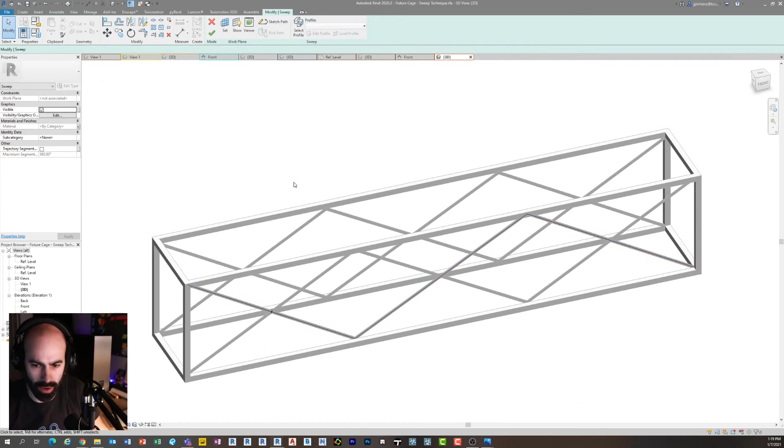But then I'm looking at it and thinking, okay, now I got to make this X on the end. Am I going to use another sweep? And I started making a ton of geometry. I'm like, there's got to be an easier way. So then I'm looking at it and thinking, okay, well there's actually two X's there - X, X, X, X, X, and then on the end there's an X. So why not just make the dang family an X?

And so what I ended up doing was making this family. So now we're two families deep - we have our host, we have our cage, and then we have our cage bracing. Our cage bracing is getting loaded into our cage family, our cage family is getting loaded into our host. And this is why I like showing this - I'll go to this diagram again. We have number 4 here, which is loaded into number 3, which is then all loaded into number 1.

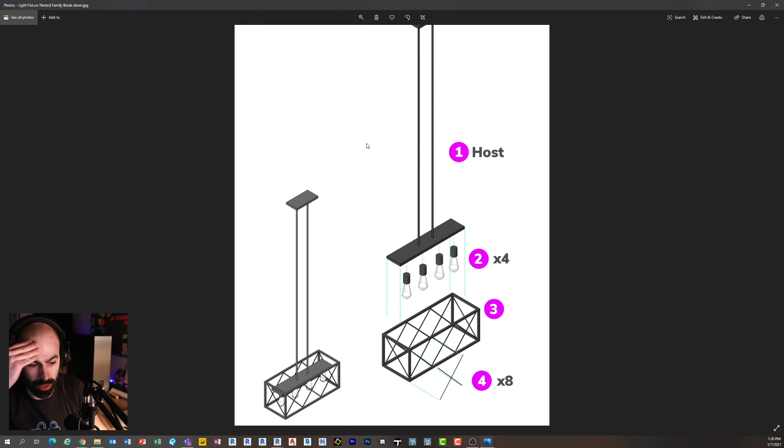And Bim Lounge just said, for the cage sketch, efficiency trumps trying to limit the amount of void geometries, thinking of family performance. Yes, sometimes it does, sometimes it doesn't. I don't think you need to worry about it too much here, but depending on the family, you may want to take a little more time to draw the geometry so you're not using as many voids. I don't think it makes a difference here, but valid point.

So now, if I go and click Edit Family, here's my brace, and the brace is another example of how to approach something multiple ways in Revit. So if I was to ask you, someone who maybe didn't think about this family or hasn't built a lot of custom families and wanted to approach this, how would you build this X? If you did this as just an extrusion, what would the extrusion look like?

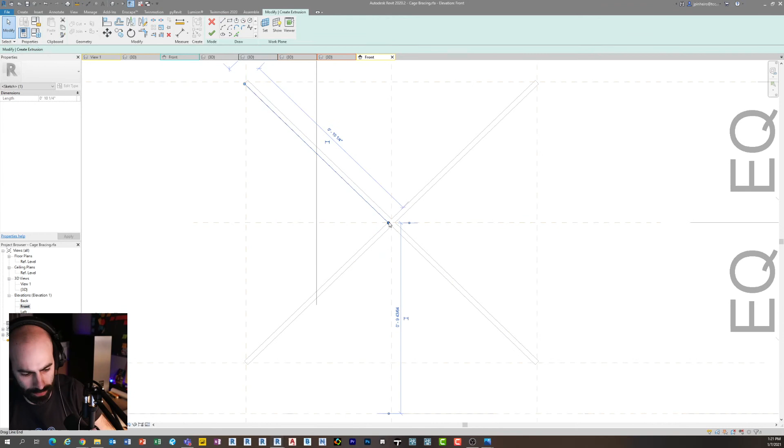Or hit F1 on my keyboard. The extrusion would look like this, right? It would look like that. And guess what? You'd have to have reference planes for all these little points, right? If you want this thing to be flexible, you'd need reference planes for all these little points.

So instead, by using 2 sweeps, all I need to do is create a sketch like this. Let me go to 3D. So I'm actually going to quickly make the X from scratch because I do think it's a valuable lesson. So I'm going to go File, New, Family. I'm just going to go with the generic model for now. Doesn't matter. And I'm going to talk about why I did what I did. So I'm going to go to my elevation view. I'm just going to go to front view.

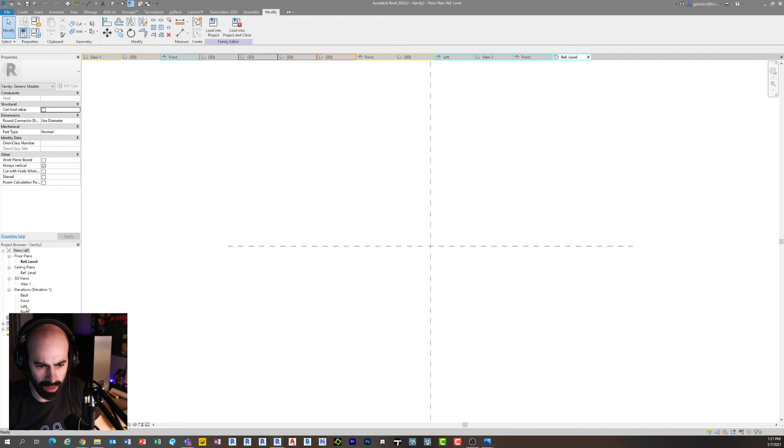And SLLM asked actually the question I'm about to answer. So I'm just going to draw reference planes just like so. So now this is all you need. And if you want, you can make a center reference plane too.

I am hitting all the wrong keys right now, by the way. Sorry, guys.

So now I can just draw. Now all I need is a width and a height, or a height and a depth, whatever you want to call it. And to be really efficient too, you may want to make a profile family as well to control the profile of the sweep. I'm just going to draw it and sketch it for the sake of today. But I would suggest you use the profile family.

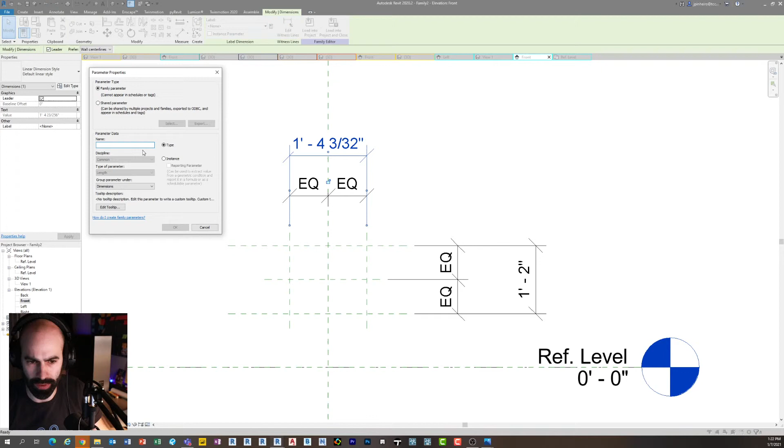And then here I'm going to say width. And here I'm going to say height. And these are instance parameters, so I can flex it. Okay. So now why use a sweep? So if I go to create a sweep and I sketch the path, I can just do this.

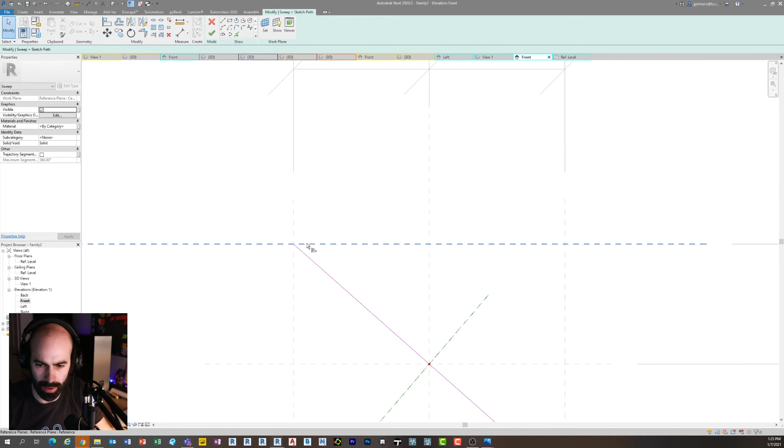For those of you that don't know how to lock a line, if I type AL on my keyboard, I hit this reference plane, look what you can do. You can actually hit the end of this line. There's a little dot that pops up. If I click that, I can lock it. If I do the same thing on this bottom reference plane and I hit the little dot and lock it, this line is now locked to those two reference planes. So wherever those go, the line's going to go with it. Same thing up here. Align, point, lock, align, point, lock.

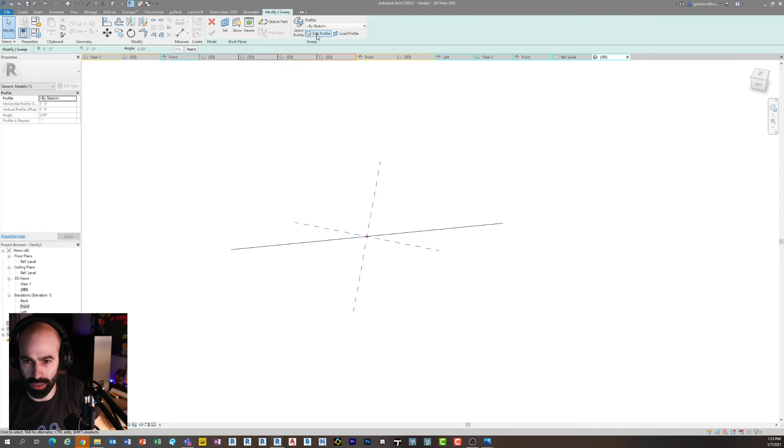Finish that. I'm going to go in 3D to draw my profile because that's how I like to draw profiles, especially when I'm at an angle. And like I said, in this situation, you'll probably want to create a profile, but that's a whole other family. Right now I'm just going to do edit profile and sketch it. All right, so I'm going to go from this side in, and then I'm just going to type in, I don't know, a 1/2 inch. 1/2 inch seems a little much, but that's okay. And then I'm going to do like a 1/4 inch.

I cannot type on my keyboard today.

There we go. And then I click finish. And then click finish again. And so now I have this, right? If I go to my front elevation, I have this. And this is flexible. See what's happening there? So now I have a geometry shape. And if I go the other way, it's going to do the same thing. And it's flexible. Okay, so now I can do the same thing on the other side.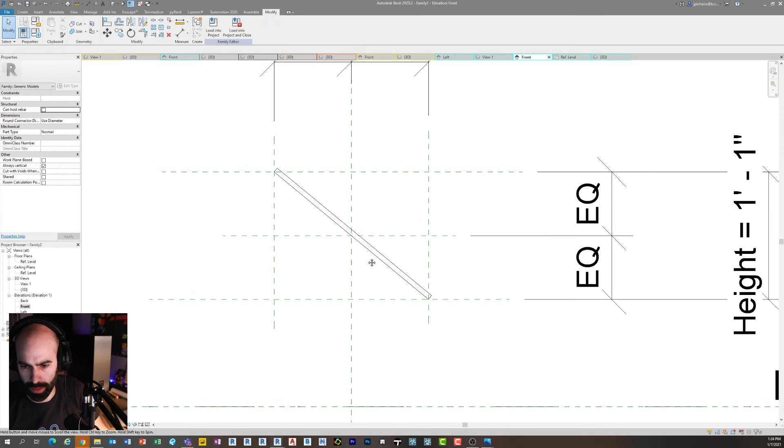I can just go create, sweep. Oops, not swept blend. Create, sweep, sketch path, go from bottom left to top right, doesn't really matter. Align, click the point, lock it, align, click the point, lock it. Again, align, click the point, lock it, align, click the point, lock it. Finish, edit profile, and then draw your profile.

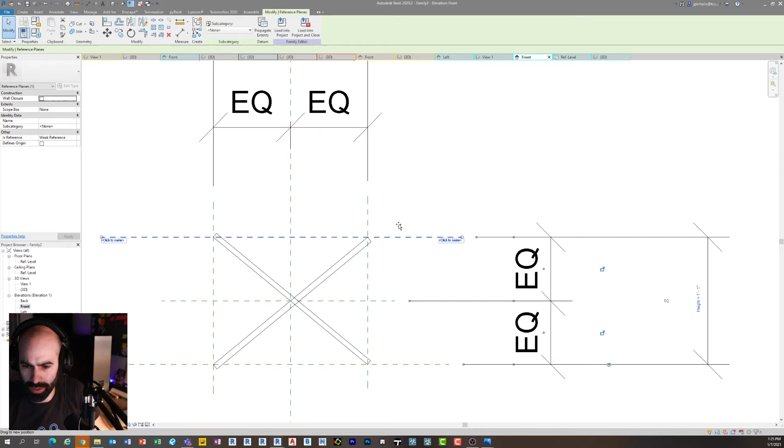And again, this is just one of those things that you could sit there all day long, and I'm not even going to pay attention to the profile now. I'm just going to draw it. There we go. But now I have an X that, as you can see, is completely flexible. And so if you sit back and think about how to approach that problem, there's probably an easier way. And again, if I drew an extrusion in elevation, how crazy would that be, right?

I'm just reading, sorry: did you lock the extremes of those X's? Yep. Alex just asked, switching nested profiles is not a thing, right? I don't remember actually if you can. There's certain areas of nested families you can switch and add a parameter to, but I don't think so. What you can do is just use visibility parameters to control things like that. The profile itself is a whole other thing. I'm not really sure.

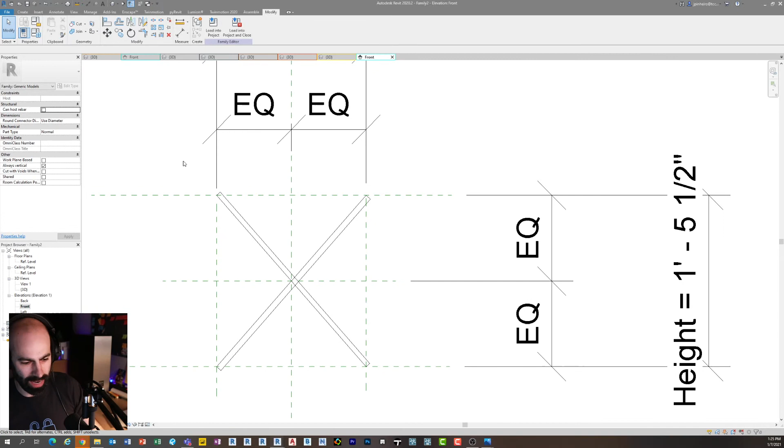So now, and it looks like BIM Lounge had a great idea, or is taking some inspiration from the sweep. So awesome, dude. That's all I can ask for.

So now when I load this back into my cage family, I'm going to turn off the sweep one. The other great thing about it is I also can use it in both directions, right? Remember, I could sweep in one direction, I could copy it along the work plane, but then I'd have to redraw it to place it in this direction. So now I can use the same family across all of this. So once I bring it into the nested family, I'm just going to place one here and show you guys how it works.

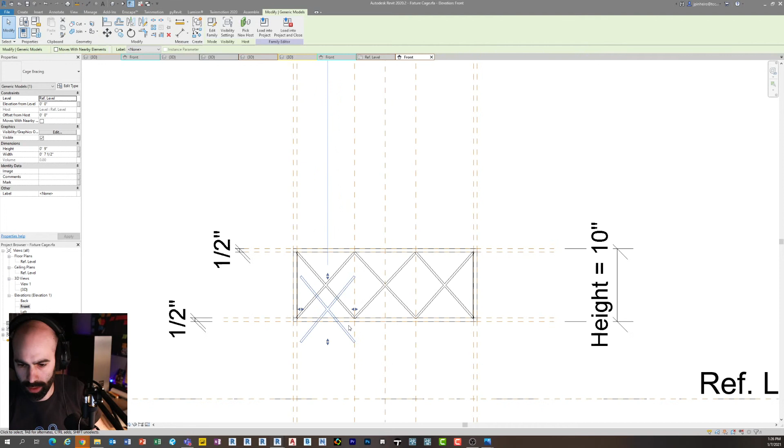So if I go to create component, here's me placing my X, right? If I go in 3D, you can see there's my X there. If I go to my front view, here's the X. Now, remember these are instance parameters. So what can I do? I can just pull and grab this and then lock it. And then I can pull this side and lock it. I can pull this side and lock it. I can pull this side and lock it.

So now, notice I just have reference planes that are EQ, right? Those are just equalized reference planes. And then I can lock this here. Lock it. Robert just asked, would it be better to center the profiles? It depends. With the center, you would just need another reference plane, right? I don't think it makes a huge difference because I am locking the outsides and it's staying where it needs to be. But yes, you can approach it.

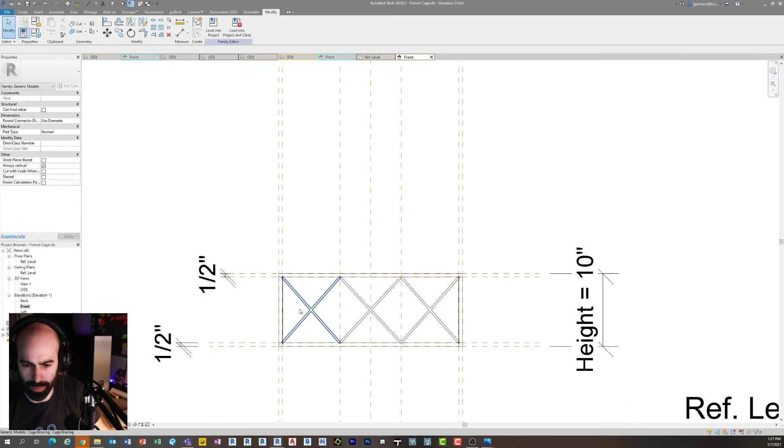If I was using an array technique and I wanted to say I want 30 X's versus 10 X's versus 5 X's, then you'd have to use centers and do a different path there. But the only other thing that I did here is I gave myself material parameters, right? So here you can see fixture cage has a parameter. This guy has a fixture cage parameter as well. If I go in here, the material under edit type, you can see there's the material parameter there. Remember, you got to give yourself the ability to modify them into the deep.

And the only other thing I did here is I gave the X a visibility parameter at the end of the day. Why? Because there was another fixture that was very similar, but it didn't have the cross bracing. So I had the ability to flex it. So then now if I go back to my host family, which God only knows where that is now. Look at all these 3D views open. Let's see. Can we guess? This one. So now with my host family, all I have to do, because remember those are instance parameters,

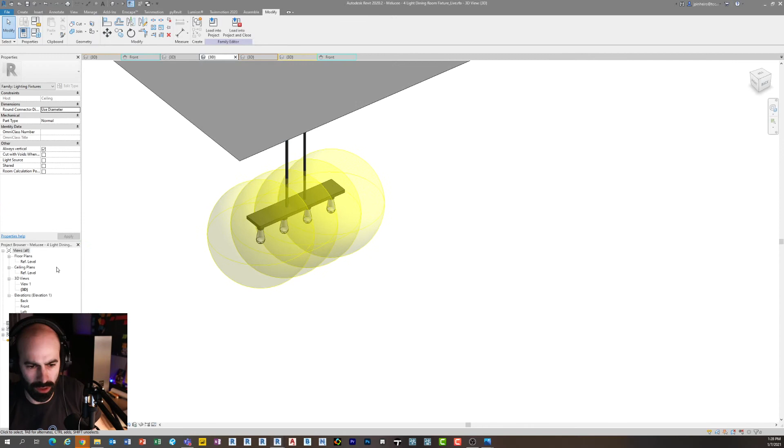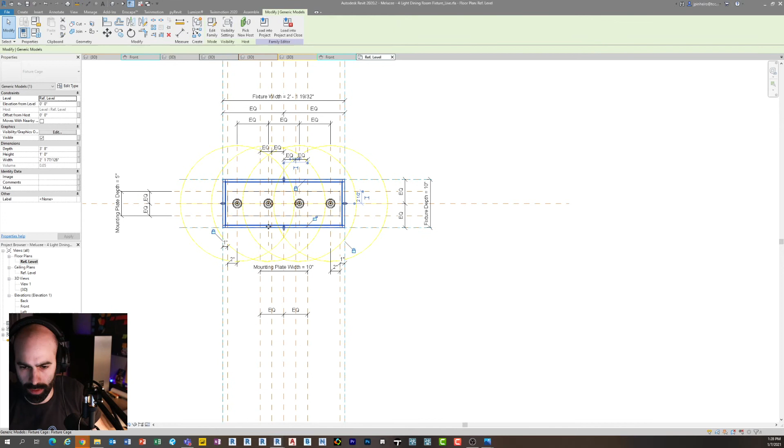is place my cage. Right, here's my cage. Okay, I can pull this and I can lock it to the outside. Pull this, lock it to the outside. You can see why I like instance parameters. I think they're pretty fun. Pull this, lock it to the outside. Pull this, lock it to the outside, and then I have to check it in my elevation view to make sure it's set up correctly. And you can see it's kind of there, but not quite.

I'm going to pull this and lock it, and then I'm going to pull this up and lock it. And now if I go in 3D, you can see there's my cage sitting pretty. And then of course you need to pull these parameters through. So if I go to edit type, I need to make sure I pull my fixture cage through, and then you can see I have my cross bracing off. I made a parameter in my host project called cross bracing off.

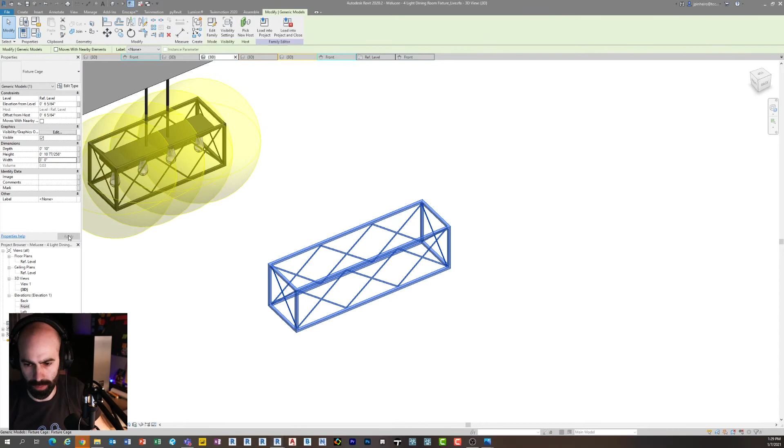Okay, so just to show you real quickly what this cage does when you flex it, because it is pretty cool. If I take the cage out here and I change the width of it to 3 feet. Click apply. You can see it flexes pretty good. 2 feet, click apply. You can see now it's completely flexing exactly how you need it to. And if I wanted to, I could turn it on and off.

So there we go. So now this thing is sitting pretty. It flexes, it's got everything we need in it, and then we can load it into our project. So now if I take a look again in the project, there's a couple things now I can do with this, which is pretty neat. Let's try this. Oof.

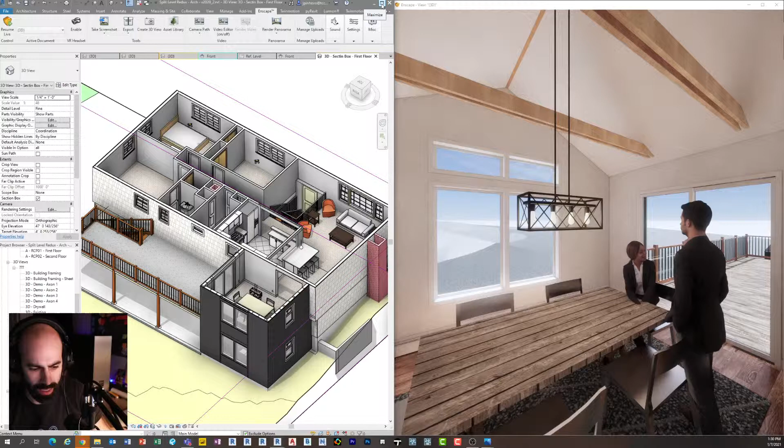3D section box first floor. Did I cover how to carry the material parameter through? I kind of did, but I can cover it really quickly. So, who was that? Stuart just asked, did you cover how to carry the material parameter through. So this is what you need to do. I think I covered it, but maybe not in depth.

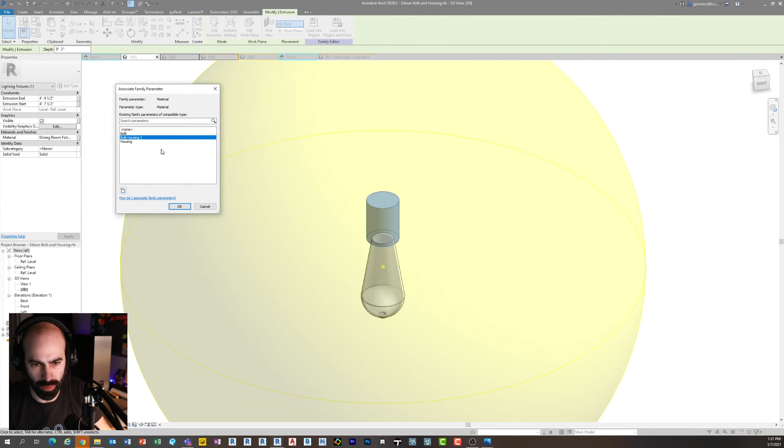So if I go in this family, and I click the object that I want, let's say there's none. This is how it'll look from the beginning. So I click the object that I want to carry through. Where it says material for that object, if I hit the little box to the right, I can add or use a parameter that's there. So first I need to give it a parameter. So I'll start from scratch on this one. I'll say bulb housing 2. So I just made one. So now I just assigned a material parameter to the housing called bulb housing 2.

Then I'm going to load that into my host. So if I load it into my host project, I'll say overwrite, sure. I'm going to select the object in the host. I'm going to go to edit type. And right here, you can see bulb housing 2. Notice how it's not grayed out. On the far right, there's a little box that says associate family parameter. You click that. Now you can do the same thing in your host family. You can assign it to a parameter. So I can make a new one or use a parameter that's there.

So that's what you're doing. You're basically just assigning and then reassigning and then reassigning until you get to your host. And then when you bring it into your project, you have the ability to modify them through. So for example, in my host project, if I click this and I go to edit type, I have the ability to change my materials as well as even my cross bracing on and off.

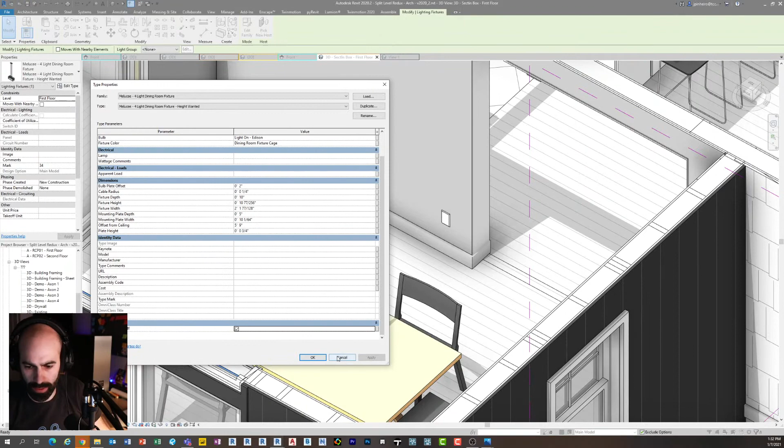Right, so I have a type here, and this is what I'm going to show you now. If I pull this over here, I'm trying to open Enscape and Revit at the same time so you can see it. So if I wanted to look at this and say, okay, I want to see it without cross bracing, you can see here it is without the cross bracing. If I want to look at it at a different mounting height, that was one of the things I was looking at, the stock mounting height versus the height that I want it at. And there you can see it.

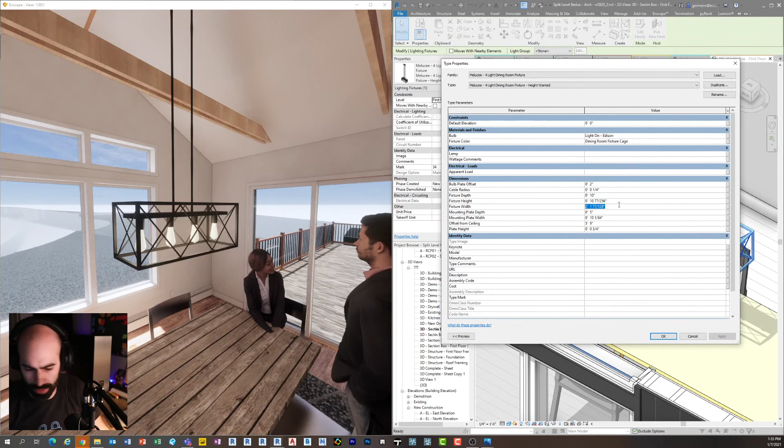And then if I wanted to modify and flex it, I can go to edit type, and now I can change and flex this however I want. So if I wanted to make the overall fixture width 4 feet, click apply. There we go. So now you have a completely flexible family.

All right. It looks like, who's that stranger in my house? Yes, Tom. I was just throwing in different Enscape people. I wanted somebody standing up and somebody sitting down for scale.